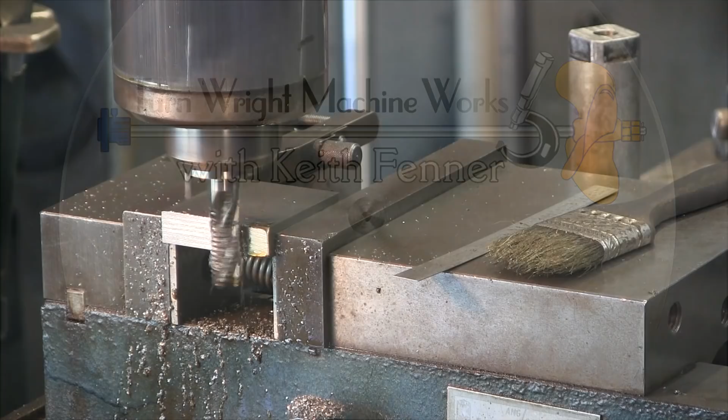All right, we're facing off the last of the uprights here, and then we'll go in and give them a quick sanding on the end, and then we're going to start putting the hole for the trunnion on the side. Now we're just using our turbo end mill just like we did on the rest of them. When we hit it on the sander, we'll be able to dress that off to where it's almost smooth.

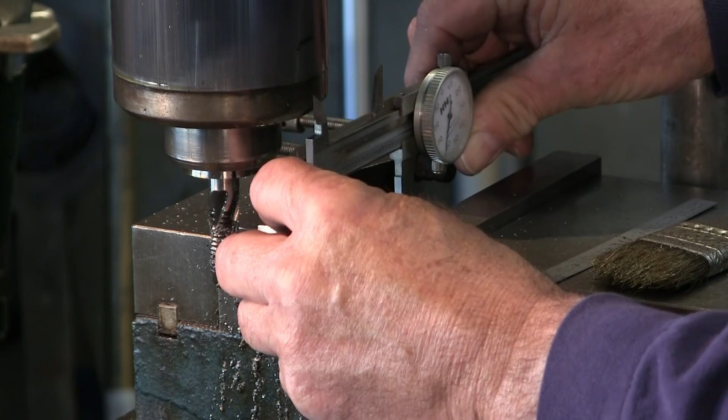Now I left this overall dimension 5/1000ths proud of the 2 1/4, so we're like 2.260 to 2.255 in that ballpark. The turbo end mill leaves a little bit of a raised surface, and I can get 5 out of that on the sander real quick. I did it that way because I needed to remove the material and I needed to speed up my process here. So anyway, I'm going to go dress these off in the other room, and then we're going to come back and start putting that hole in there for the trunnion.

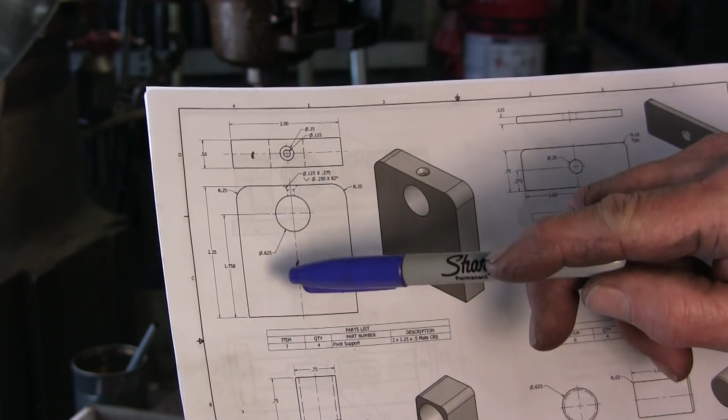All right, we're up here. This is item 7, I guess, the end block, the trunnion pivot in this position here. We just finished facing them all off, 2 1/4 inch in height. They are 2 inches wide. That's the raw stock, and they're 1/2 inch thick. This hole location is center side to side, and we're shooting for 1 3/4 inches on the height. It does say 1.758, but somebody just got a little carried away putting that in there. So anyway, we're gonna zero in on our hole right now.

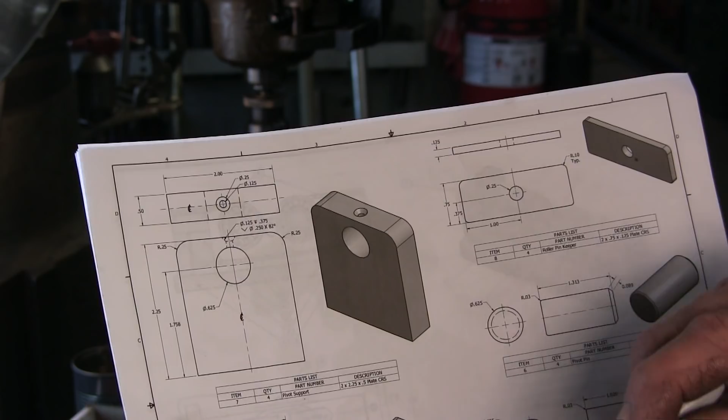Now we're set up, and we got our stop back here. We're using the clamp again. We came in with our turbo end mill and faced off to our length or our height. When it's laying down, it's a length. When we stand it up, it's a height, right? So anyway, we've got our edge finder. We're going to pick it up and come on up 1 3/4 inches and over from our stop. We're still dialed into our vise itself, so we can come over from that and start poking that hole in there. We're going to do the hole before we come in on the top.

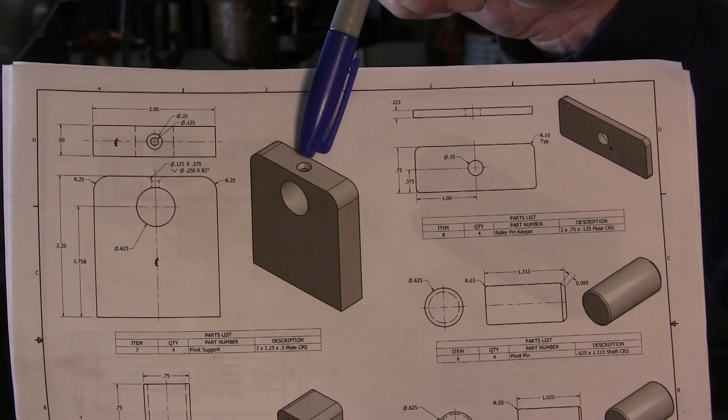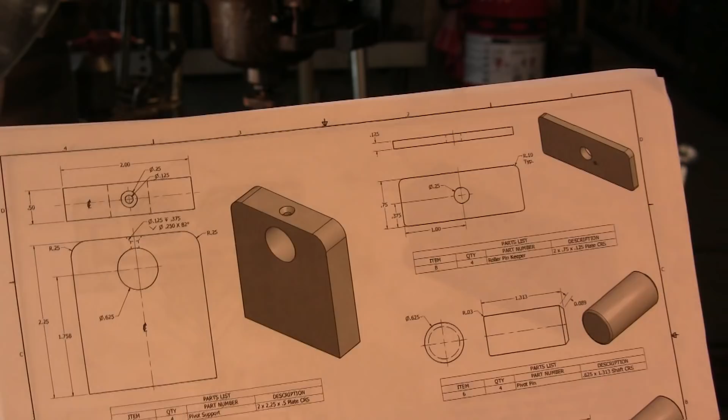On the top, you can see that there's an oil hole, and I simply put that in with a center drill. Kind of made the cup and the hole all at one time, so the dimensions aren't exact. They don't have to be exact. This hole is actually 1/8 with a 1/4 countersink or chamfer. It just means put yourself a good diameter that you can drop a couple drops of oil in with the squirt can and get the oil flowing down into the trunnion area so that it doesn't rust up.

Okay, we put in our edge finder here, and we come on over 1 inch. An inch will be in the center of that plate. There we are. That's locked, that's locked. We'll loosen this one up. Okay, come on down. We're going to come on in just until it kicks. There we go. We'll set 0. All right, try it again. Okay, it repeated. There's our 1/4 inch offset. Zero that back out. Now we're centered to that.

And here again, we go ahead and put in our tap follower just because it's a nice piece. Boom, it's 0. All right, we come on over right to our 1 3/4 inches right there. We verify it right here. All right, we're there.

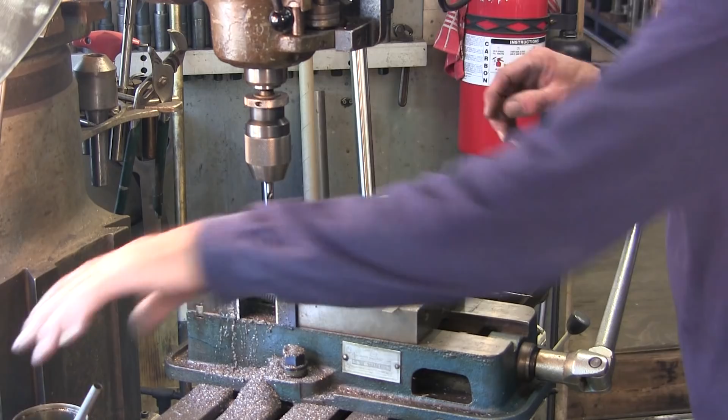We grab our 1/4 inch drill bit, and we're going to do the same thing as we've done with all the other 5/8 holes, except for the reamer. I think we're going to step up the reamer to give it a little bit more clearance. We want to make sure that we don't have a tight hole. This is the first time we're going to want a loose hole. Alright, so let's get cutting oil, the right direction.

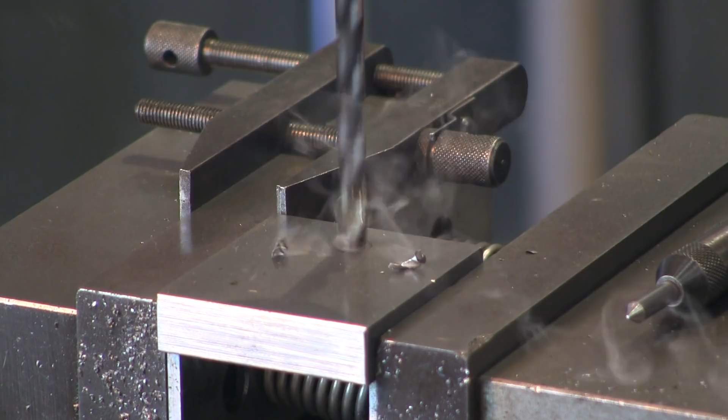And we're still using the X against our stop there. We kind of know which way it's going, but we want to make sure that we keep the top. We'll make sure each one of them is darkened so we can set back in there. And we'll go through and we'll finish drilling all 12 of these.

Alright, we finished our 1/4 inch hole. We went over to our Leslie sharpener there, and we went ahead and dressed up this tool bit here, and we're going to check and see how it does on cutting. I was pulling 2 chips at once, staying pretty tight.

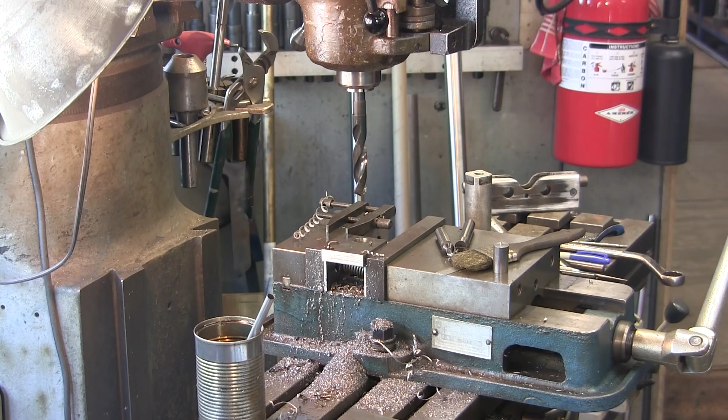We lessened our drill angle too on it from its original grind. It had a little bit sharper one. That one was starting to pull a chip off of one side more than the other. It wasn't drilling an oversized hole, but it was getting pretty big. Anyway, we're going through and we're going to be poking these holes in here. Let me just see. Get some chips off of here, and we'll pull this one out and just see how close we are.

And we're about 607 thousandths. It's a pretty good size. The one that we drilled where it was opened up a little bit is 613 thousandths. So we just wanted a little bit more material on our hole to ream, and we'll go on through the rest of these and bring them on out to this diameter.

Okay, we found this Yankee reamer, 0.6299. This Yankee reamer should put a Whistle Dixie slip fit on that pinhole in here. And we'll go ahead and we'll come on up a little bit here. Okay, what we got on speed? That's a little fast. Okay, let's bring her on down here. Okay, that's 80 RPMs. That's the slow speed on a Bridgeport belt drive J head.

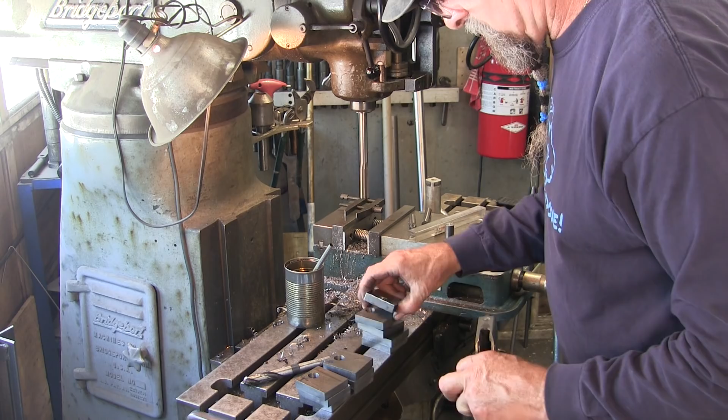All right, little air. Okay, let's check our fit. Oh yeah. We're gonna love that. All right, I'm gonna set that over here like that. I'm gonna put in another one here so we can get a pair of them on there. There we go. Alright, I'll be able to set it right up here like that.

There we go. Awesome. We're gonna actually be welding these riser blocks to the base plate. Okay, I'm gonna set on here. I'm getting used to that now because I stamped this and I want my stamping to be vertical, not upside down. All right. Want that to be nice and free swinging.

And then that way, no matter what contour we're going to be using our rollers on, we're able to have an easy swing, so it'll self-align itself with the axles or the shaft that we're going to be rolling on these. No, we're going to go ahead and ream the rest of these, and then we're going to drill the oil hole. Then we'll decide how we're going to put the radius on the corners at the top.

Okay, I got this set up here before we go for the oil hole on the top, because we're in line with this hole, so I put a chamfer tool in here so we can break a nice sharp edge, remove anything. We're just giving it like 30 thousandths, something like that. Okay, we pulled out the parallels, the springs we had holding that, and we vacuumed up and we wiped this out. This is pretty clean here now.

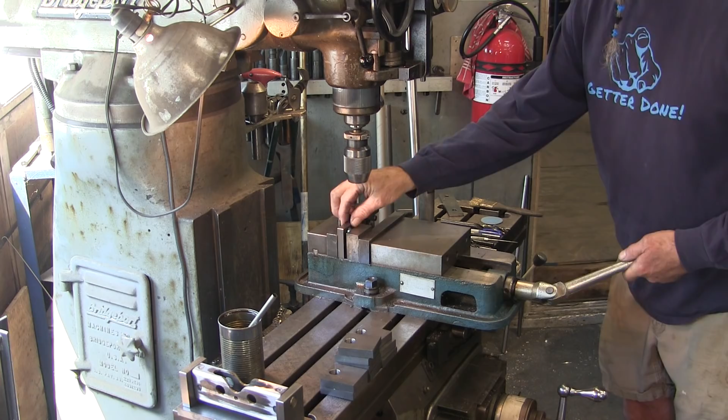Does it hold the jaw there? Pull it out, put it in, tighten it, pull it out. Does it handle air? Yeah, handles air. All right, I think we're gonna let it run like that.

And now all we need to do is go ahead and pick it. Now on the drawing, this center drill here, this is a number 4. It is pretty close to 1/8 of an inch pilot, and its diameter is almost 5/16. So that's pretty close to, I think, what's on the drawing.

All right, let's go ahead and change up speeds here. There we go. Okay, what we found now was our part was lengthwise before, and now it's widthwise, and the 1/4 inch that we had there, so our reading had to come over to 1.250, and that actually puts us exactly on line.

So we still didn't have to mark anything. We thought we were gonna have to put a line. By the time I grabbed it, I kind of figured out what happened, and we're just putting the part in sideways versus lengthwise.

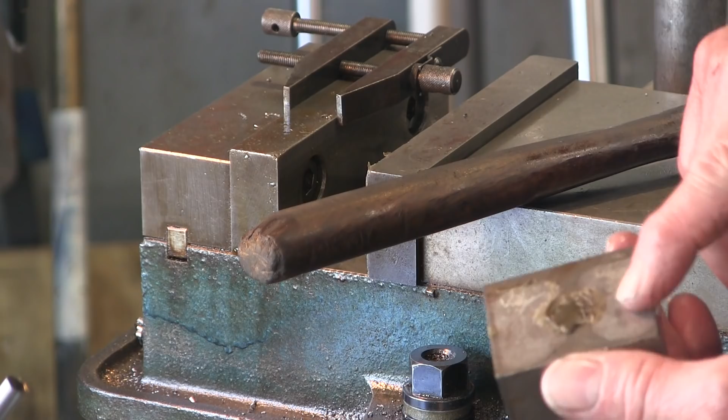Alright, just getting ready to pull this out, and I thought you'd want to see how well monkey shit holds. Okay, I can't push that out, so I'm going to put the butt into my hammer here, and I'm going to give it a little thump here. There we go. Okay, and see, it really spreads out real thin there, and same thing here.

Alright, now we're ready to set up for the next thing, and that is to go ahead and put the radius on the corner.

Okay, we cleaned up all the parts. We're doing 3 sets, so there's 4 to a set. So we got 1.5 sets here, 1.5 sets here, and we decided to go ahead and run all of them in the vise at the same time, so we can hold all of those over to the square on that side, and we'll put all of them to the square on that side.

Now I see one out of line right here, and I got to see if there's a chip or something underneath it. And yes, the chip is underneath. Okay, well that was pretty neat, you could actually see that.

Okay, those look good, those look good. We tighten them up lightly. Give them a good look. Close enough by eye, close enough by eye.

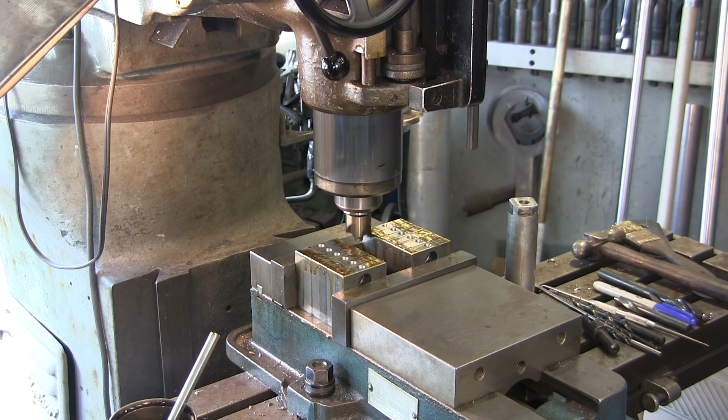Okay, I'm just eyeballing at center. I'm choosing to start here. We're going to come down this one, go up that one, come over this one, go up that one. Just a figure 8.

All right, we came out past this one. And we're going to come to this outside here. There we go. And we're going to put a little brake on it. You see how that jumped? Because we're trying to climb mill.

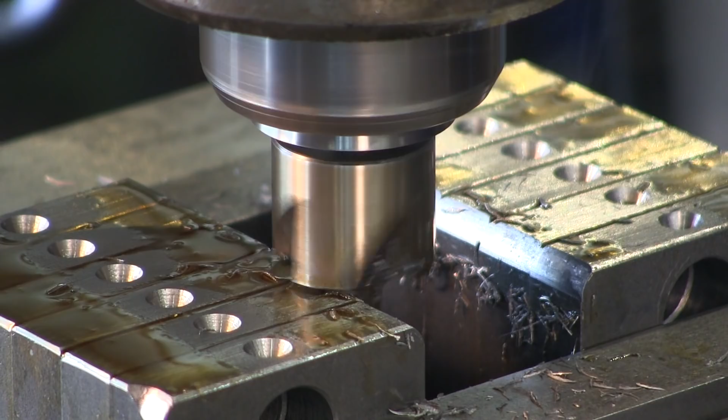Looks like we'll be able to do this in 2 passes. I'm coming over and catching close to the vertical, and I'm about 30 thousandths from going all the way down. So we got the lower part of the radius. When I bring it in for the next pass and bring the top down closer, we'll make that radius more full.

Okay, come to the outside. We brought her down. She's still not quite all the way down, about 5 to 10 thousandths off of the top here. But that curve or that radius there is going to be good enough. We're going to kiss them, dress them in the sander before we do any welding, so we can blend some of that in there.

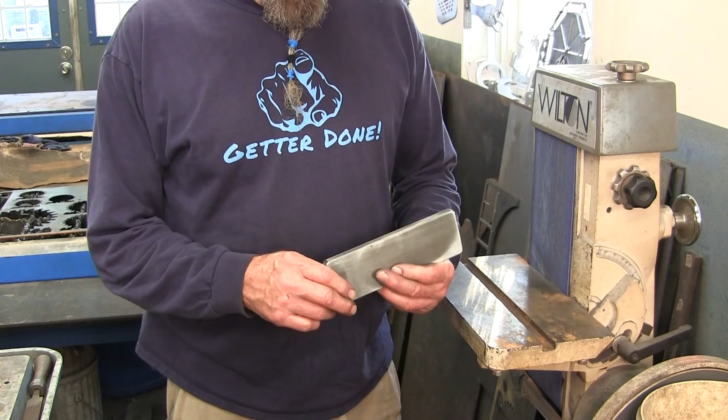We just got back out here after dinner, and we had been working on the base plate, and we did all the radiuses on the edges here, but we didn't do any machining on the end. We just came in here and sanded it and brought a nice clean sand finish to it, and then dressed it off, rounded it this way on these sharp edges of the flat, and they're doing fine.

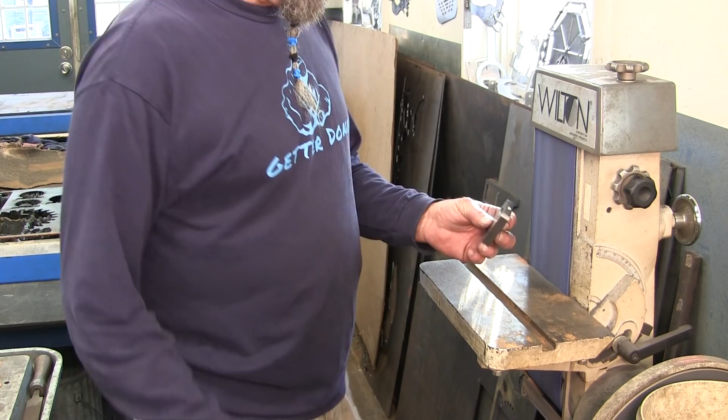Now we're kind of doing the final dressing on the trunnion support, and we're just rolling it, breaking that corner right there, both sides. And then once around, now there's no sharp edges on that at all.

So we got 1, we got 8 more of these to do. I turn it over and I do the same thing, so I keep the contact equal, so it's the same break or radius up here as it is down here.

And of course, rolling it around the corner lets you get that broke there. So they're nice and clean, finished looking parts. Even though we faced this off with a turbo end mill, we still got a really nice looking part. But my Wilton also kind of helps the case here.